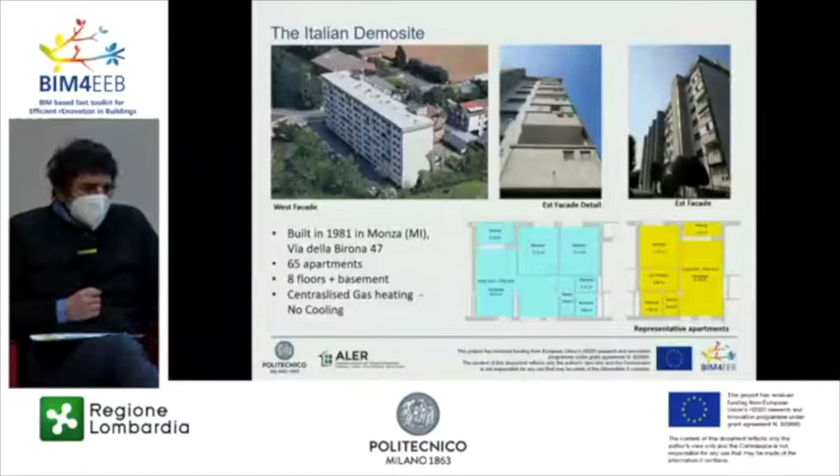Which were the challenges we encountered? Well, the main one that really impacted all of the ALER organizations. As ALER, we are able to manage interventions, starting from the project, request for funding, call for bids, and intervention. This is something we always do and that we always manage.

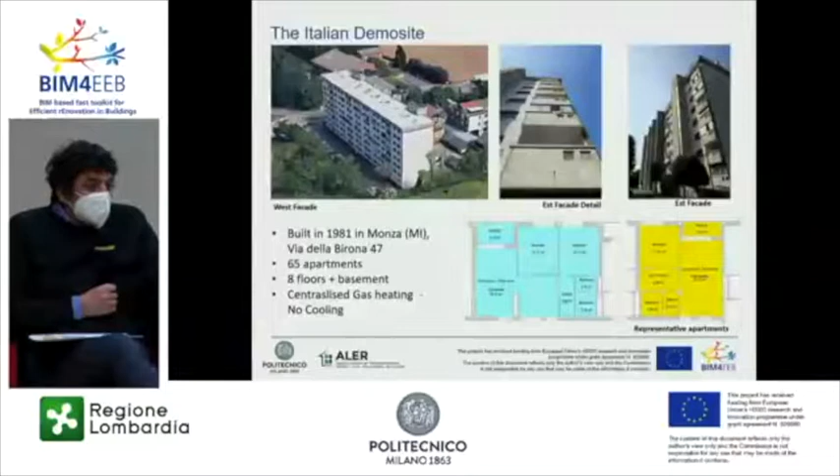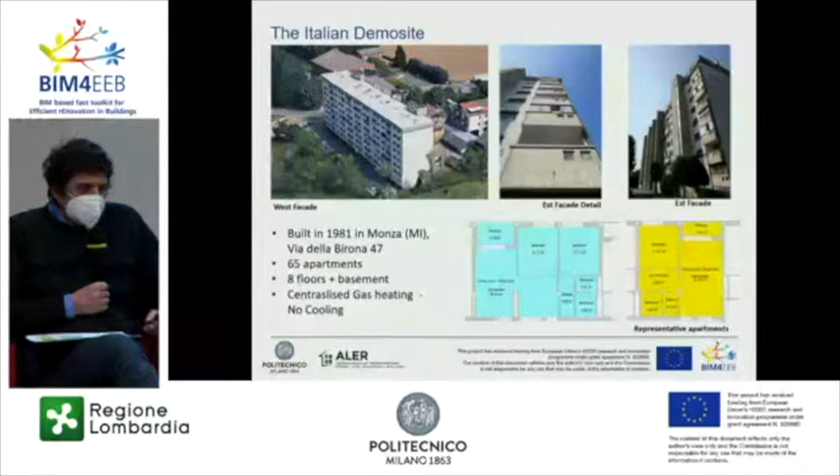Of course, we are working with small micro enterprises, SMEs, and therefore this million of euros that we had to use with numerous SMEs. And it's very difficult to invest the resources.

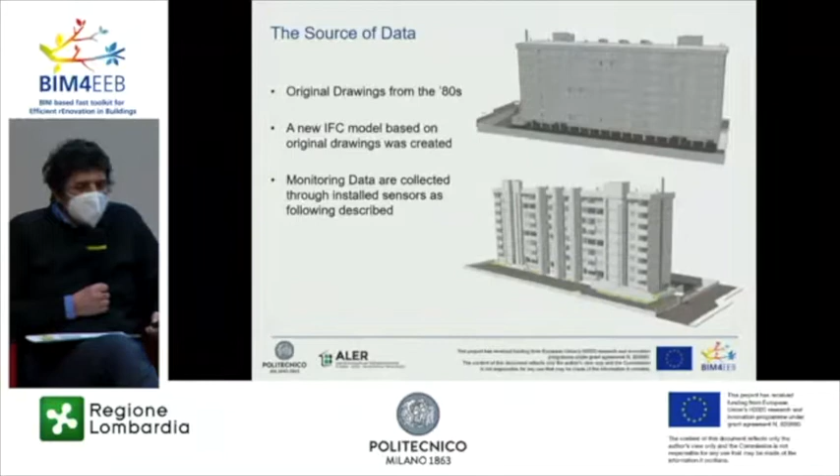Oh, yes, you want me to show the slides. In fact, this is the 3D model on which we worked a lot.

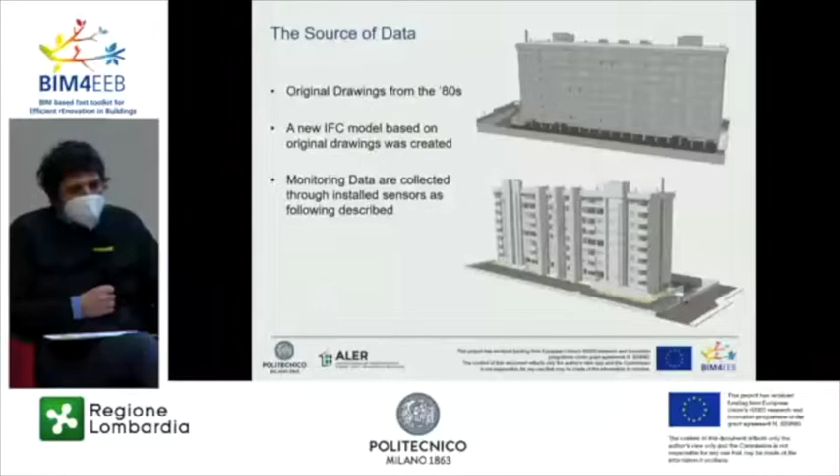Small and medium enterprises were our counterparts, and they're difficult to involve in the works, with very, very low costs. The call was really at low values, low cost values, and those who participated to the tender or to the call really know it was extremely difficult to satisfy that low level of cost.

These are some of the pictures I was talking about. This is the building. You can already see how we intervened. One of the objectives was that of maintaining time requirements.

Unluckily, as you know, we experienced the COVID outbreak, and this did not help us at all. Some enterprises had to close because of many infected workers.

So we are working and intervening in these buildings that are occupied, and we really had to involve the occupants to better use the tools that were created. That aspect was extremely interesting and showed the positive approach that institutions had with the people living in the building.

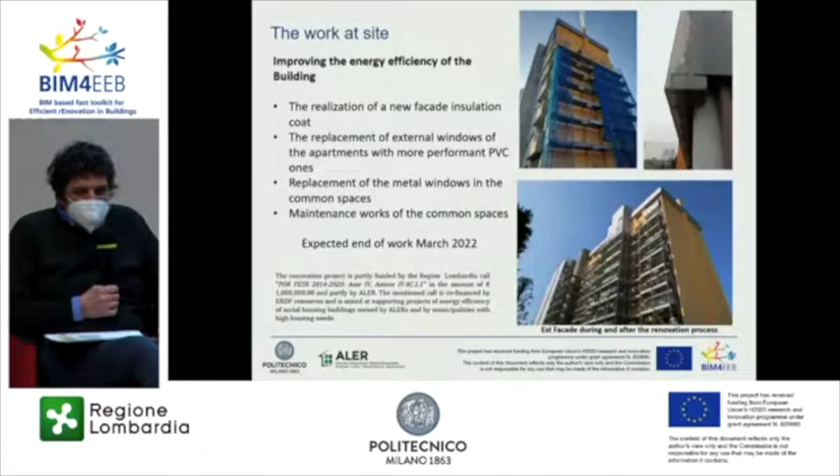So the occupants participated willfully, even if there were some constraints. Of course, as you can imagine, it was not easy for them.

ALER manages social housing sites, and so the occupants are quite dishomogeneous. There are many poor occupants, fragile occupants, and we went to great efforts to talk to the occupants.

So as to allow them to understand what we were going to do. You see, even though it might appear banal, entering the occupant's home saying you need to install these 4 sensors because we need to measure this, that, and the other, it was not always easy.

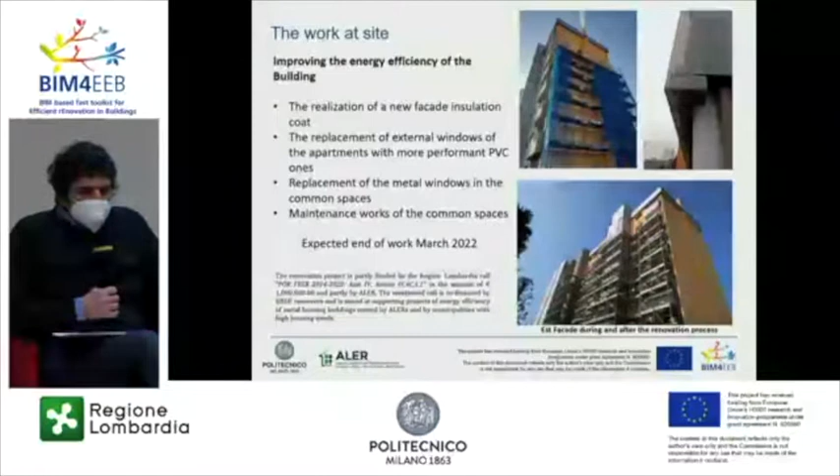Nonetheless, and Engineer Mainini is going to better explain the whole situation to you, we managed to achieve successful results. These are some other pictures of Via della Birona in Monza.

We have a short video that includes also some pictures of the construction site. It was carried out, and the first thing we did was to mount the scaffolding.

And unluckily, what happened was, maybe you know already, in Italy we have these situations. There were the possibilities of investing in this bonus that in Italy is called 110%, which is extremely valuable. But what happens is that it's not always easy to obtain it, and to obtain it, there are some price limits, price thresholds.

Luckily, the company that worked on this building used the scaffolding over the 6,000 square meters of the perimeter, and they built up and down 1,500 meters of scaffolding so as not to incur high costs and be able to achieve this 110% eco bonus that the Italian government has offered to refurbish and renovate buildings.

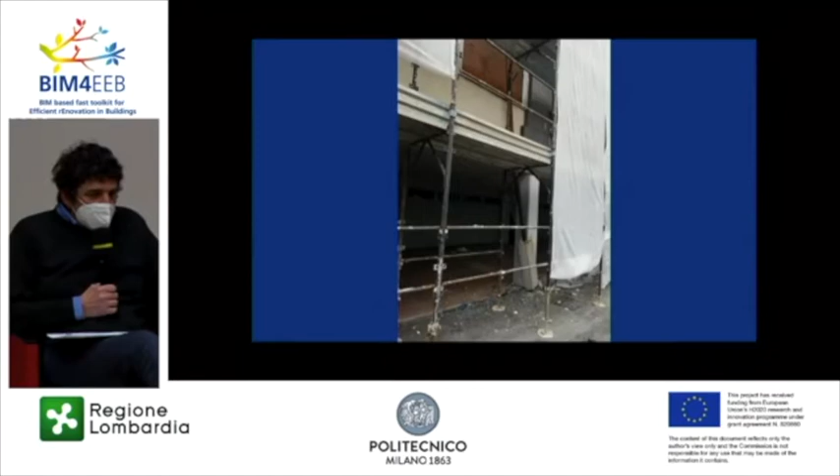This building was made in 1981, and this was the class that construction sites stuck to. So it was normal, not because it was a social housing project, that they built in Class G.

This project really improved and enhanced, thanks to the sensor installation, the microclimate achieved inside the homes so as to improve the comfort of the occupants. So Andrea, if I have forgotten anything, do pitch in, please. On my side, I have concluded.